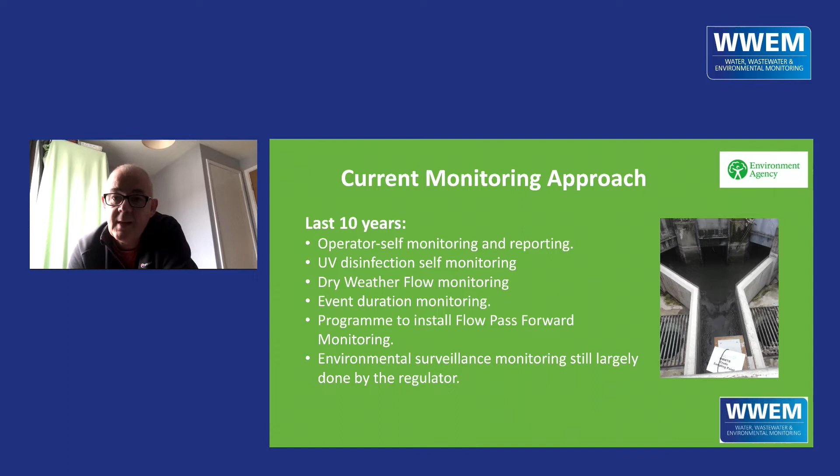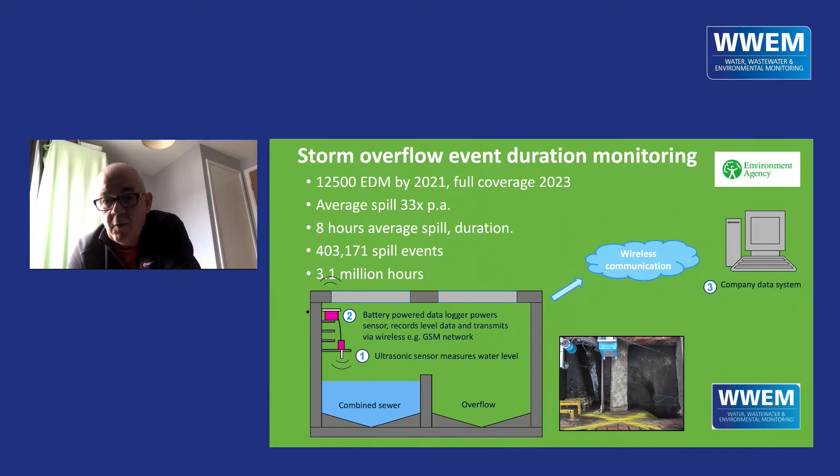So next slide, please. So a bit of an example. This is the EDM monitoring that's gone in. We will have full coverage of EDM at storm overflows, which monitors the length of time a storm overflow is discharging and when it discharges, and that's reported annually. We'll have full coverage of 15,000 overflows by 2023. We've currently got about 12,000 overflows monitored.

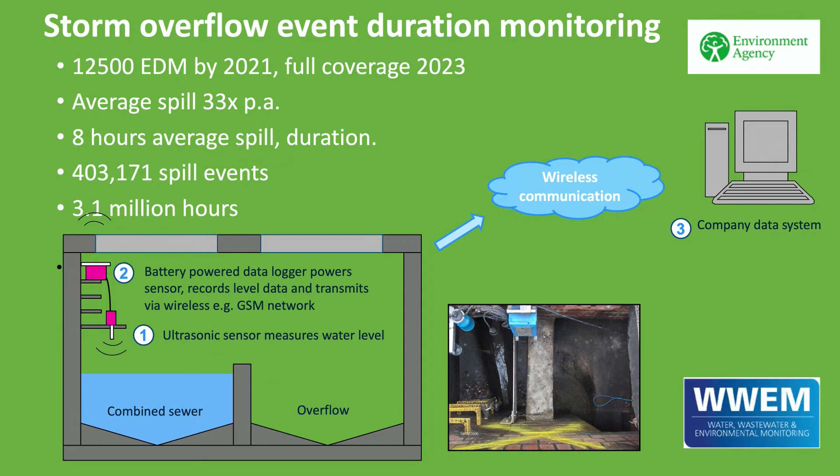That's 80%. And that's already driving a lot of investigations. We've got 700 investigations going on into frequent spillers. We are currently doing a lot of compliance investigation around the returns. It's also informing the DEFRA-led Storm Overflow Task Force. So this is where we're using the data to inform planning and legislation such as the Drainage and Wastewater Management Plans and the Environment Bill. It's underpinned a lot of the thinking around wastewater planning in the Environment Bill. Next slide, please.

You know, I don't think it's any reason to be alarmed. It's just they have less overflows further down the networks, which is leading to these figures. This information is great for planning and useful for compliance, but what it has driven is a massive increase in public and political awareness, and that's leading to calls to minimise or even eliminate storm overflows.

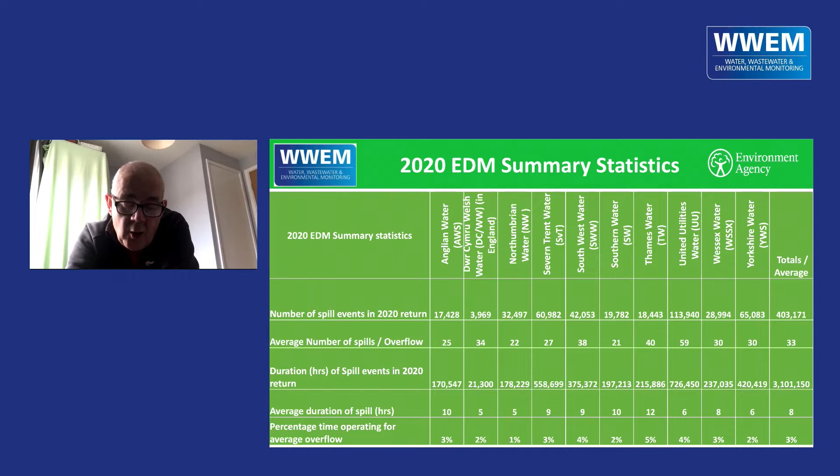So it's having a massive impact. It requires an awful lot of work for us to help manage this understanding, but it's also illustrated where we need to do a lot more work to reduce discharges in the future. So next slide, please.

Another example, this is flow pass forward. Pete Baker talked about this yesterday, so I'm not going to go into a great deal of detail here. But this is the programme that I'm leading for the EA. About 5 years ago, we asked the question, what do we really know about FFT? It's a permit condition, but do we really regulate it?

And it was triggered by some strange things we were finding, such as depressed ecology downstream of wastewater treatment works, which we thought really shouldn't be there. There was no reason for that. There was no other pollution source. The final effluent was fine, and so on. I mean, that triggered some local investigations, some of which have just concluded recently, and indeed triggered some significant enforcement action.

But it also led us to think about, well, what do we need to do to get a better handle on this? So, working with the industry over the last 5 years through the FFT Flow Task and Finish Group, we have got around £80 million worth of investment, so that we're going to get 3,500 new FFT monitors and EDM spills into storm tanks put in by the end of this AMP, with a little bit of carryover into the next.

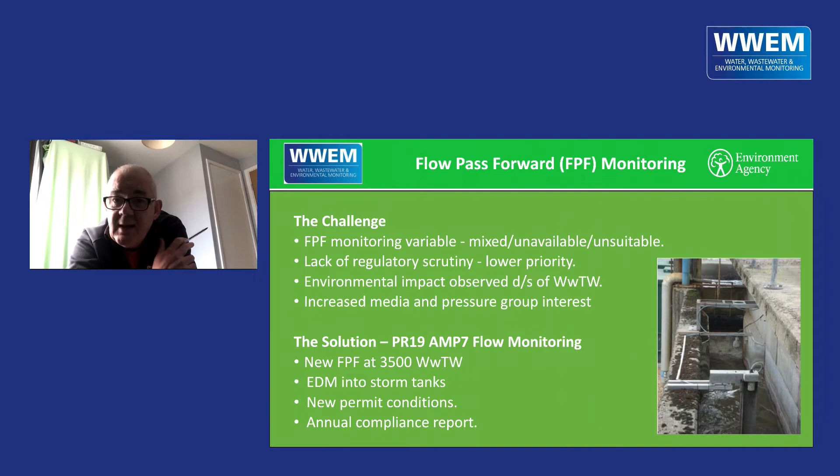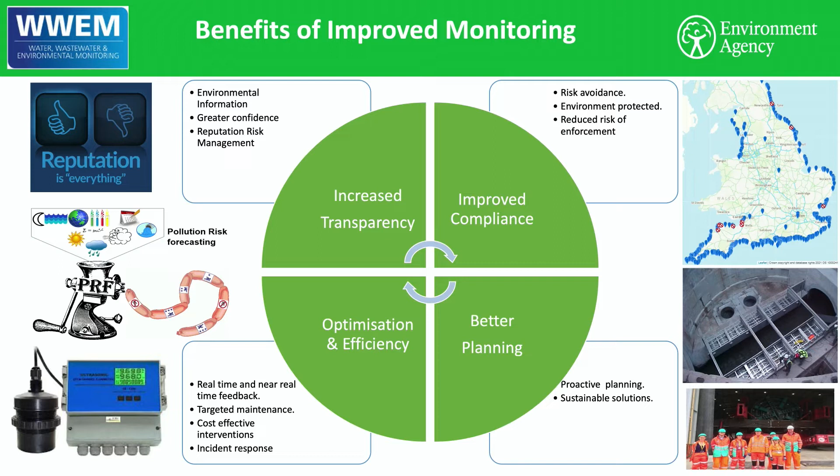But one of the great examples is we use EDM information together with rainfall radar and other information in our pollution risk forecasting, which allows us to warn bathers when there might be poor water quality. And this has been a really successful example of using monitoring in real time as part of a wider package to the benefit of the wider public. Next slide, please.

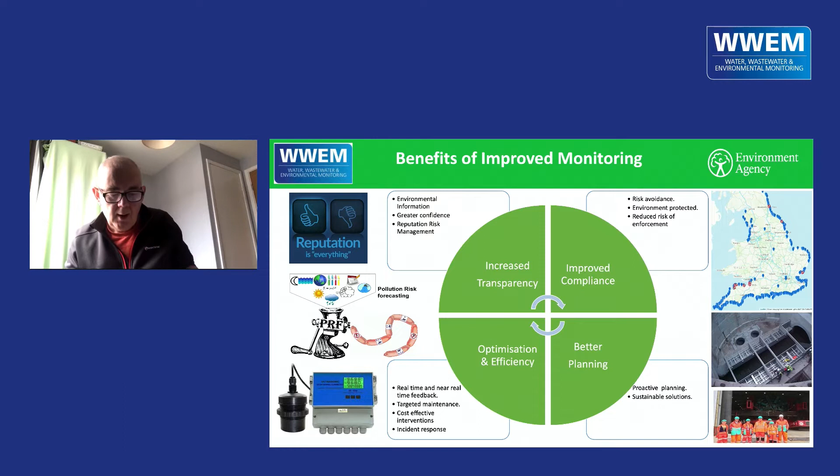So, we as a sector and as the regulator are losing what the new EA Director of Water, John Leyland, is calling the media air war.

It's EDM monitoring, WFD classification, and soon FFT monitoring, which is driving the unprecedented ENGO media interest and political interest. There's far greater expectations, such as the demand for rivers to be of bathing water quality, as we've seen in Ilkley in Yorkshire, and there's a number of different schemes going on there. There's some very sophisticated pressure groups, such as WASP in the southeast, but they're now acting around the country. That's the Windrush Against Sewage Pollution, who are using the data that we are collecting and providing to them to influence policy and legislation and highlight their agendas.

It's taking up an awful lot of time to manage this. And as I said before, it can detract from actually trying to fix the problem in the first place. But it is capturing the political imagination, and it's really this which has driven the EAC.

Monitoring not only highlights the problems, but it can provide the solution. So it can show progress, it can show things are moving forward and getting better, and this is what we need to do in terms of this media air war. We need the pressure groups, we need the ENGOs, but we also need to help them understand the complexities of monitoring and the data and how it should be used to help us in the long run. Next slide, please.

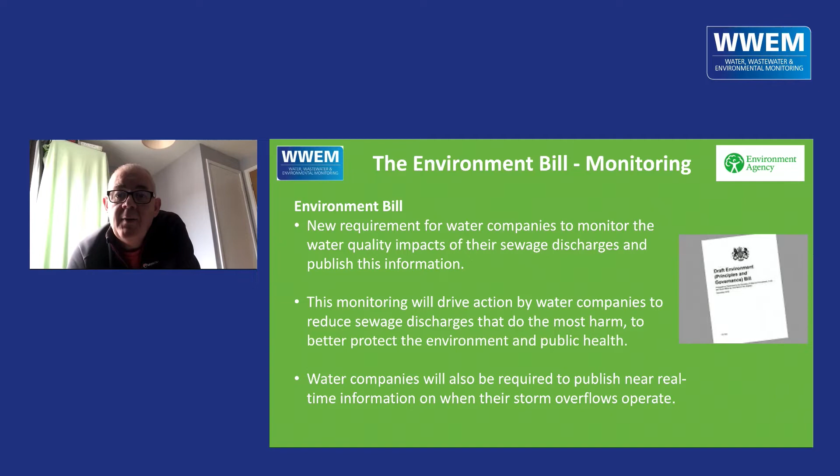This is the long run. The Environment Bill, looking to the future, includes big sections on monitoring for pollution. It reflects the political and public demand for more data on discharges and their impacts. There is a switch from the tradition of EA doing all the monitoring in the water environment in terms of surveillance and such like. We'll still do surveillance monitoring. We'll still have the primary role there for WFD reporting and so on.

But increasingly, there will be a greater emphasis on water companies using continuous monitors, upstream and downstream of discharges. That's CSOs or storm overflows and continuous discharges, to assess the impact of those individual discharges, and then scaling that up to see what the collective and the cumulative impact is.

There's also a requirement in the bill for companies to publish what they're calling near real-time information on storm overflow discharges. So this is pretty much what we're doing already for pollution risk forecasting and such like in the SwimFo apps. But within about an hour of receiving the data, the expectation is that we will be publishing this on the website.

Whether that stretches into the upstream and downstream monitoring data, whether we need to live stream that and things like that, then that's a big challenge for all of us. Logistically and practically, it's going to give us a real challenge, but if we get it right, it can provide some incredibly useful information and help us reduce pollution in the long run. Next slide, please.

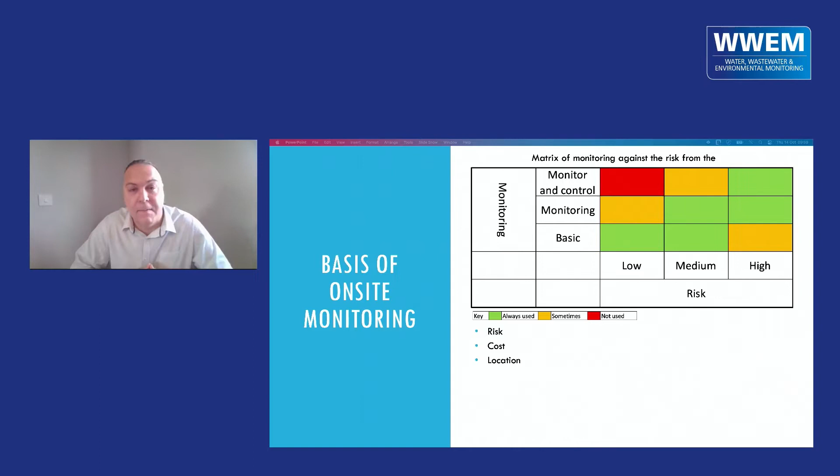So this is what we're deeming our small sites. So we're looking more at our descriptive permits at the moment. Generally only domestic sewage, shouldn't have any real industrial stuff in there. So a small population equivalent, package plants, small filter works, but not terribly complex, and generally old, tried, tested kind of equipment. So we do basic monitoring.

It is on-site tests, turbidity tubes, ammonia test kits, and one that is overlooked, I think, quite a bit, which is observation by operators. When they go on site, they'll notice smells, sounds, changes from the norm is the best way to put it. Has the colour of that effluent changed slightly? Have the smells changed on site? And all of that is generally difficult to quantify into electronic information, but it will be recorded. There might be other bits and pieces depending on where it is. So they might need pH or DO control monitoring on site, and that would be generally handheld.

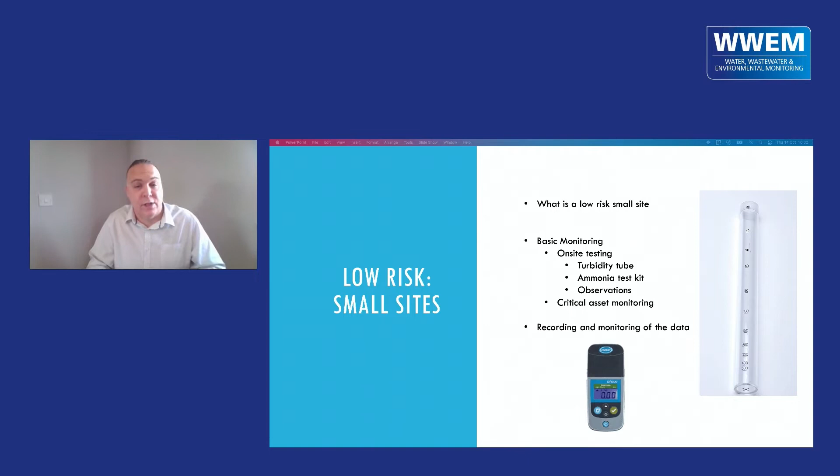The recording and monitoring of the data is very, very basic. You've only got those signals coming off. Any other information is what is recorded by an operator, probably in text. So it's not terribly easy to get that information out and use it in a really useful kind of format. And that data is rather limited. So your small sites, your descriptive sites, are not going to be visited that often. It might be weekly or even up to monthly on some of these sites. So we're not going to have a lot of data on there, but it doesn't mean that they're not doing the job. That's the risk. So if we can move on, please.

So from the top end of our small sites to our medium sites, we're now looking into our numeric consents. These will often have storm and emergency discharges towards the top end. They're generally more complicated. So at the bottom end, it might be multiple package plants put together, so we've got flow splits and things like that to deal with. But it could be larger filter works, oxidation processes, things like that. So a lot more complicated. Generally, these will have other complicated processes compared to our simple sites, so they're going to have mechanical screening and things like that on site.

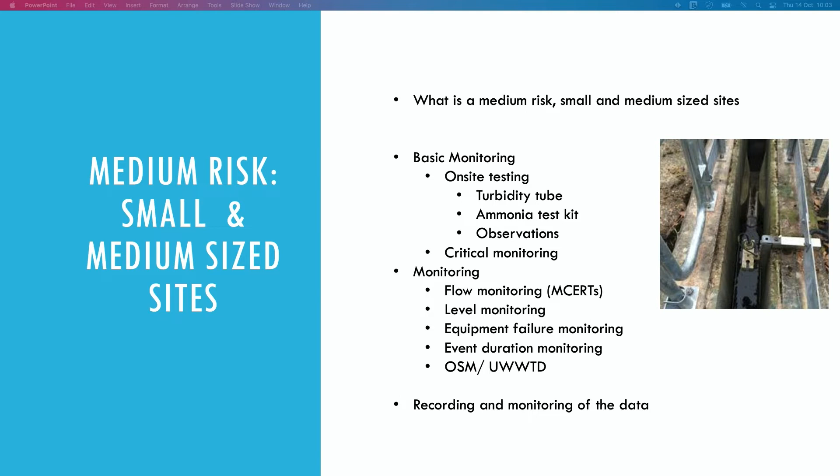So there's a lot more to do when we're looking on site. We're going to do that basic monitoring because it's a good method of seeing how different parts of the process are doing, and we can do that through the process. So if we think we've got issues, we can work back through the process doing all of those kind of things. We're monitoring those critical parts of the system as well, just like on the basic ones, but now we're moving up a bit. We're doing a lot more monitoring. So a lot of these will fall under the MCERTS flow monitoring. So now we've got some real-time data on the back end that we can interrogate. We've probably got level monitoring on storm tanks, things like that, so we can see when they are filling and when they're not.

As we've already spoken about, we've got event duration monitoring. Certainly on the larger sites, they will fall under that. And we're starting to get some kinds of automation. So we might have desludging on PSTs and humus tanks, but only on a timer. Nothing exciting, but only on timer.

And then we're into our OSM, as Dominic's already sort of covered, and our urban wastewater treatment sampling as well, which is all done by a third party from us, even though, as Dominic said, it's the water industry, but it has to be done by a third party so that it's fair, so that we can't alter when it's sampled and things like that. So we do get a degree of scrutiny from that.

The recording and monitoring of data, we've now got quite a bit more data. We've got real-time data almost on a lot of these things so that we can interrogate them as it happens. This data is held electronically so that we can easily access it wherever we are. And during the pandemic, that has been a godsend for all of us working in process controls. It's easier to gather, it's easier to report, and we can report it fairly well.

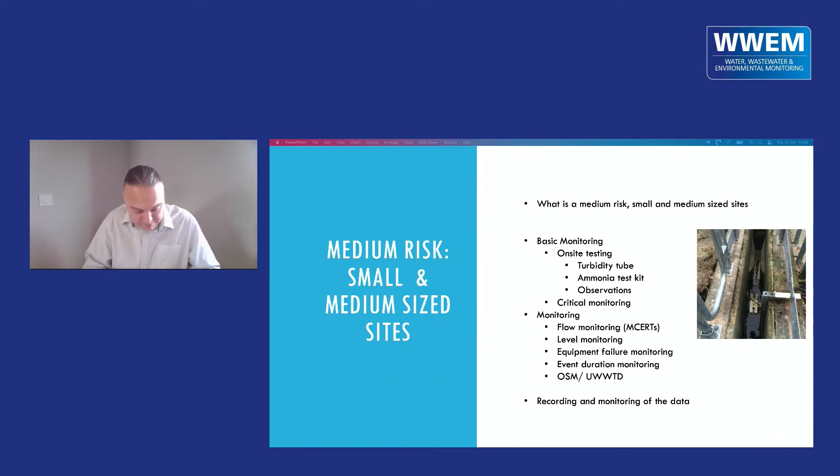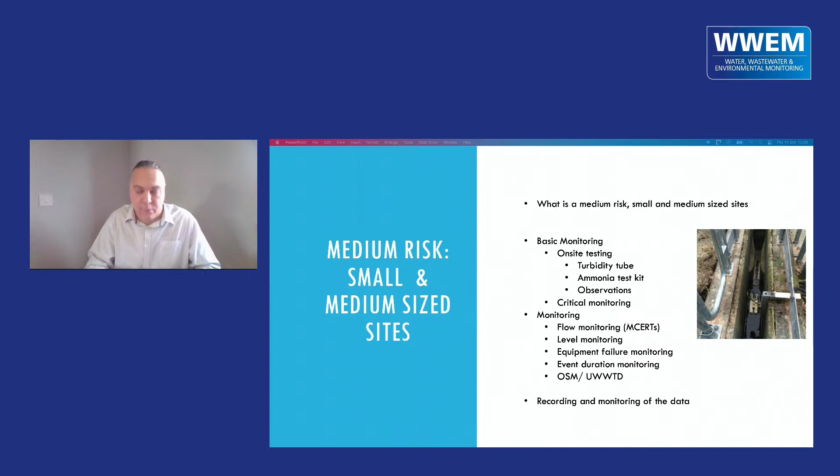What I will say about this whole bit is it's very resource intensive. So this is where most of our manpower spend their time. This is going to be at the bottom end, definitely once a week, site visits through to 3 times or more, possibly weekends, depending on the risk that is put against it that we see from that. So that gives you an idea of we're getting a lot more complex now with those works. So next slide, please.

These are a lot more complicated sites. They treat very large volumes of sewage. They've almost certainly got some kind of industrial effluent in them. So they're having to deal with probably slightly different processes. And in that, to manage these really large sites, we have to put in more automation, which is more cost.

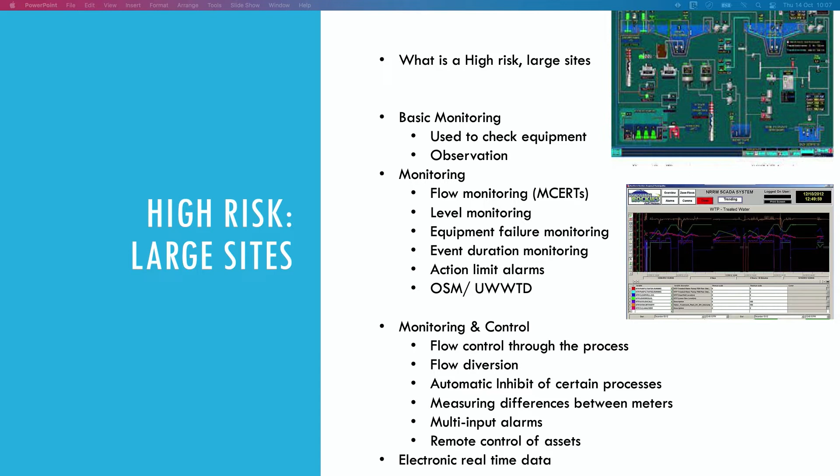So we will use the basic observations and basic checks that we've done on all the others to check that our automated equipment is actually doing what it should be doing as a secondary check. So we're still doing that, and they're still relying on observation, but we're doing that to make sure that the data that we're getting off from our overriding information that we're getting is correct.

So monitoring, yeah, we'll have flow monitoring, both probably now moving into this AMP period, inlet and outlet. We'll be level monitoring at probably several places throughout the sites, because we'll have intermediate pump stations and things like that as we move through. So there's a lot more data of where these flows are going and at what times, and that gives us information on where we might have individual asset problems in between.

We'll have a lot of equipment failure monitoring because there's a lot more automation, so there's a lot more things to go wrong, so we need to react to those as quickly as possible. We've got the event duration monitoring, but we've probably also got on these now action limit alarms. So because we've got this real-time monitoring, we can respond before we get to a problem. So we will know the time to consequence. So we can go, right, we need to act at this point here to stop an issue later on, should we have some kind of failure on site.

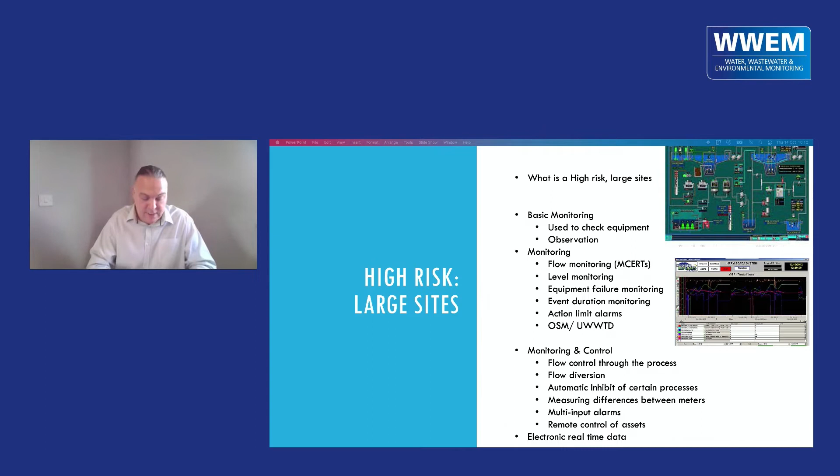So in AMP7, as we've already touched on, we've got the flow to full treatment and EDM under UMON 3 and UMON 4. This gives us a great opportunity to use this information that we're putting in to link to other data sources using multiple input alarms. So if we've got high levels coming in, but we're not seeing them going out, if we've got high levels coming in, but it's not going through the right part of the process, there's a multitude of things that we can link together to give us a real picture of what's going on. I'm going to come back to the AMP7 thing at the end with the demand for data, because there is a question over data.

But new technology, so mobile communications, means that we can have monitoring on sites that we didn't think was possible. I'm thinking about my MOD days now, where we've got sites right in the middle of moors, 30 miles away from anything. We can now monitor that easily, cheaply. As technology moves on, the cost greatly reduces. The size of bits of kit reduces, so we can put them in better places. We can swap bits of kit out for newer, live information, rather than having a bit of kit where we have to go and download the data every month or whatever. We can now get that live.